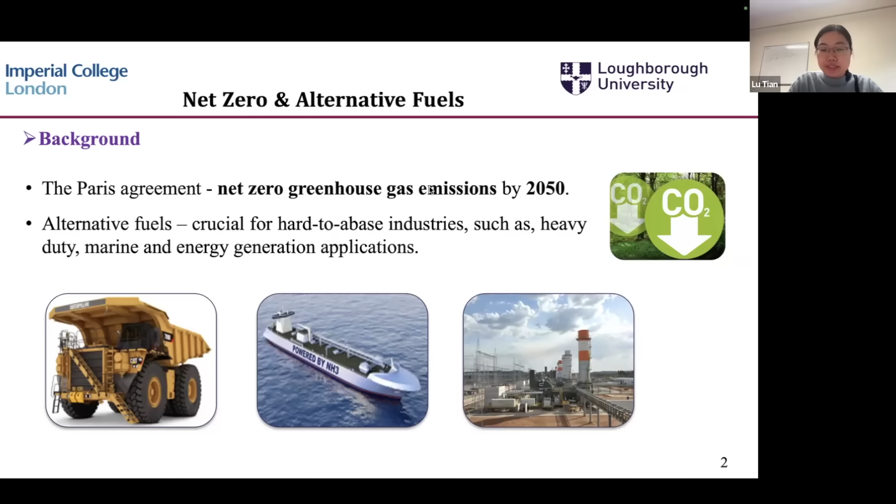So all of these applications are likely to need alternative fuel in the near future. Our question would be: which fuel do we want to use for these applications? We have multiple choices as alternative fuels, each with pros and cons, and we don't have a definite answer at the moment. What I'm presenting today is just about ammonia, but I want to list some topical candidates as alternative fuels, so maybe later we can discuss which ones you want to research and work on more.

So we have ethanol, biomethane, hydrogen, ammonia, and methanol as some of the most topical candidates for alternative fuel. They can be made from different resources: ethanol and biomethane can be made from biofuels and organic matter, and we can make hydrogen, ammonia, and methanol together at the same site using different methodologies, including renewable production methods. We can use water electrolysis to make hydrogen, and then make green ammonia and methanol from that green hydrogen. So we have a future of producing ammonia in a green fashion - that's a very key point.

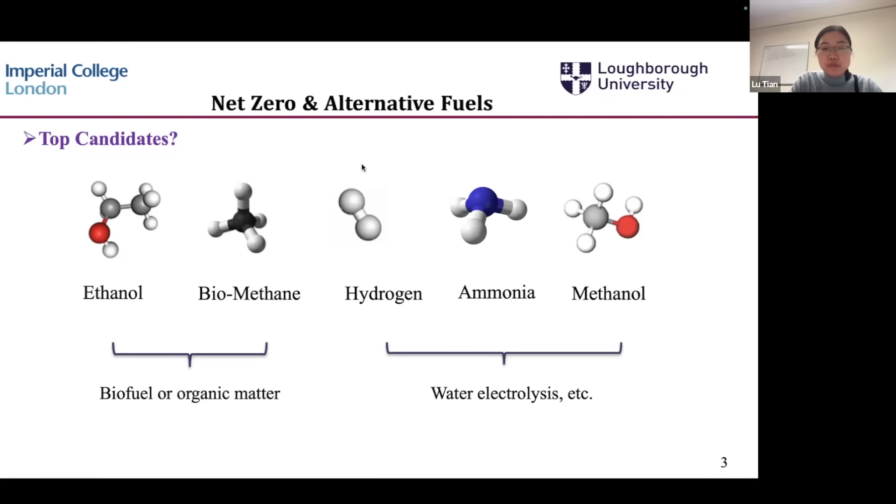The second reason is why we are pursuing ammonia - what is its history? Where did we use ammonia before burning it in energy or industrial burner applications? Ammonia has great applications, as perhaps all of you already know. It's been industrially produced in large quantities before, predominantly for fertilizers and chemical products. Because of this, there are a lot of benefits - I'll show this on the next slide - because we already have a great network which we can use to transport ammonia as a fuel. And we all know that ammonia contains hydrogen atoms, so it's a promising hydrogen carrier.

So the motivation of burning ammonia rather than hydrogen is that we can transport ammonia already. Why do we need to convert it completely to hydrogen? Can we just burn it as a fuel? So that's the biggest motivation.

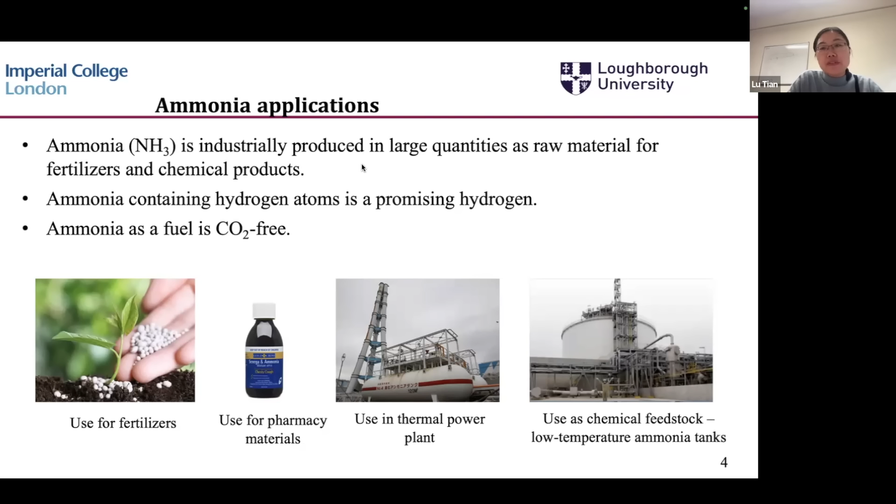And how can we do this? There are definitely challenges that we'll talk about on the next few slides. So before I do that, let me show you this graph. You may have seen this already if you work on ammonia. This is just to say, apart from the good ways of producing it in a green fashion, we also have a great network of transporting ammonia across the world from one place to another. As you can see, it's actually connecting different major points across different continents. So this is a good thing. It is a basis for our research on ammonia.

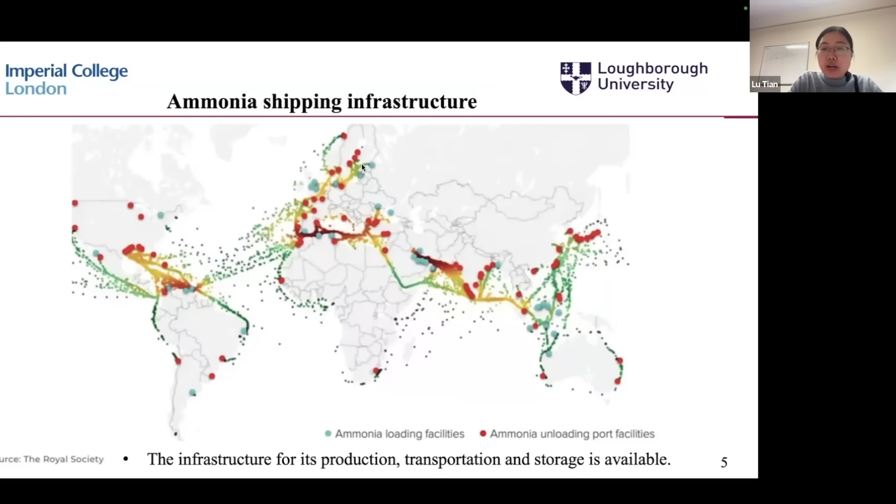This shows the great potential of moving ammonia around the world if we can produce ammonia in large quantity. So the second question is, okay, we have this infrastructure, how do we burn it? What are the challenges of that? Before I talk about that, this is just one slide about the history.

The interest in ammonia didn't just start in recent years. Actually, several decades ago, people already had interest in ammonia, especially in the US. For example, in the 1940s there was an ammonia and coal-powered bus in Belgium. Then there were studies on the ammonia gas turbine invested in the US. And also there's a combination of ammonia and liquid oxygen rocket motor that people investigated in 1967. You can see that's the period where people were quite interested in aerospace applications.

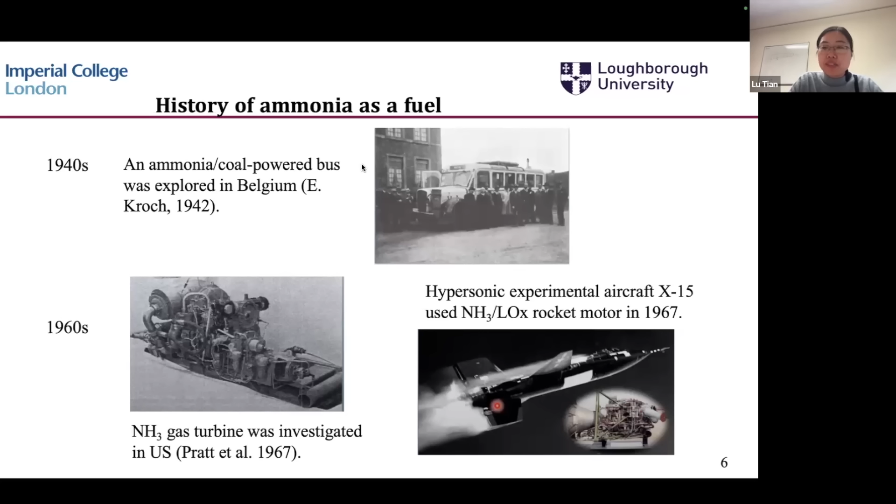That was being applied to gas turbines or hypersonic aircraft. And then the interest decreased as people met difficulties. In recent years, the interest in ammonia came back again. So we want to use ammonia as in our traditional, for example, internal combustion engine and so on. Can we do this? What are the challenges? Let's move to the next page and talk about that.

Since most of us here are actually doing combustion, I think we are quite clear about the advantages and disadvantages already. But if you don't mind, I just want to talk us through this a bit again. So why are we doing ammonia? Because it saves costs for hydrogen storage. It's difficult for hydrogen to be transported and stored. So we transport ammonia instead. If we burn ammonia, that saves the cost of transporting hydrogen otherwise.

It has mature synthesis technologies. We have methods even to produce it in a green fashion. And it's carbon-free, so it's NH3. It doesn't have a carbon element within it. So we consider that kind of environmentally benign if we consider carbon dioxide pollution. But we will talk about something else.

Then it comes to disadvantages. For example, ammonia burns very slowly. It has very slow laminar burning velocity. And because of the presence of nitrogen element within ammonia as a fuel, it can potentially generate high nitrogen oxide emissions, or we can just call it NOx, which is not pleasant either. We don't want it. It can be bad for our environment. It can also be bad for human health.

And third of all, ammonia itself is toxic. So even a small amount of it entering the human body can hurt people's health. So we don't want to have a lot of ammonia left in the end in the exhaust pipe. So we don't want residual ammonia either, people call it ammonia slip. So we want ammonia to burn more easily, we want less NOx, and we want less ammonia slip. That's how we want to overcome the disadvantages of burning ammonia as a fuel.

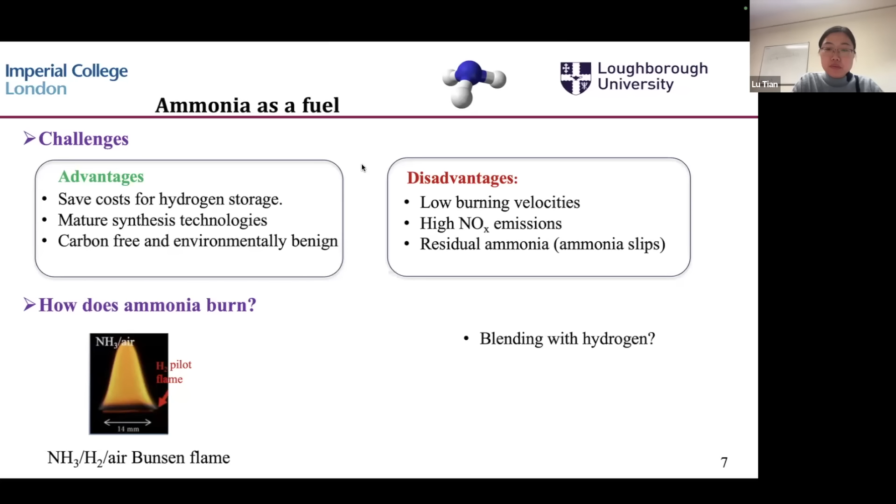Some of us argue that hydrocarbon fuels are not necessarily fossil fuels, because now we have carbon-neutral fuels that contain hydrogen and carbon elements but are not from fossil fuels—they're made from renewable sources. So there's also potential for blending ammonia with a hydrocarbon fuel. But the question is, if we bring the carbon element back to the fuel, it may generate soot. So that's the second work we're going to look at: how ammonia affects soot formation.

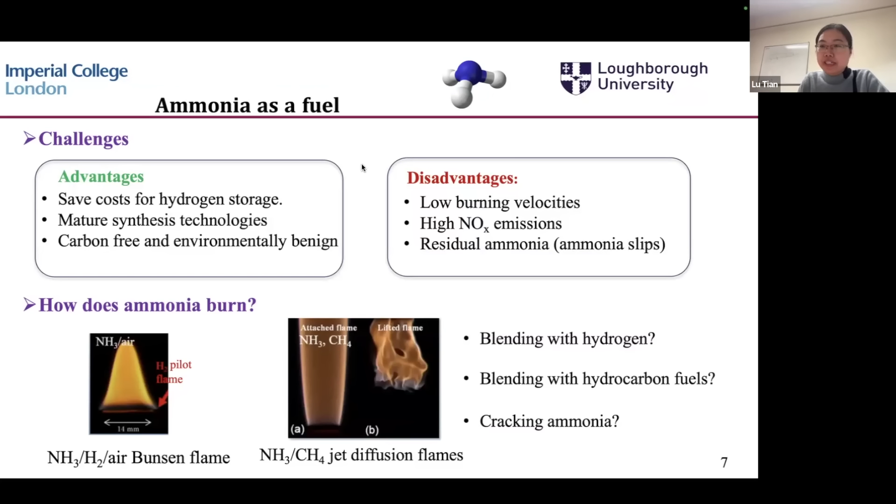The third work I'm going to look at today is how we can increase the chance of ammonia being burned. We can crack it into a mixture of nitrogen and hydrogen, but we don't want it fully converted, otherwise that would effectively be burning hydrogen. So we're looking at a particular cracking ratio, and whether we can reproduce the results from experiments. So these are the three works I'll talk about today.

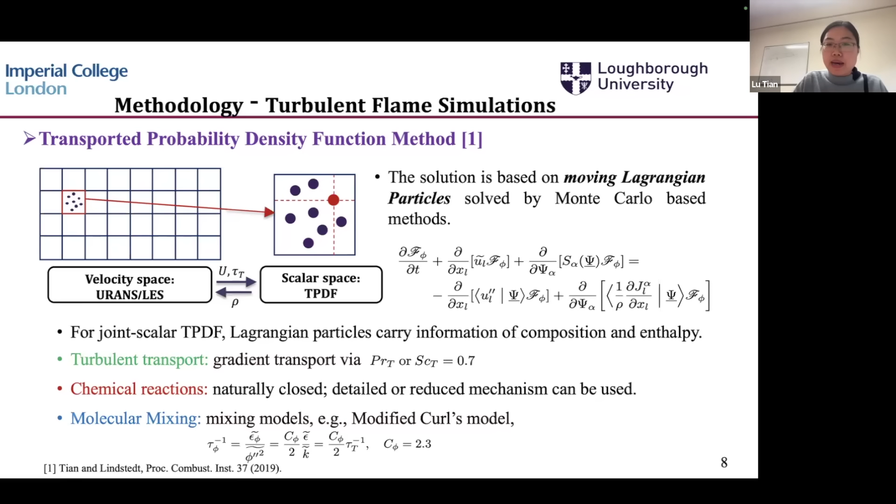So this is basically the introduction of the methods. If you still have details you're not quite sure about, that's entirely fine - this is not the key point of this presentation. I just wanted to introduce this method so you have it in the background. Let's move on to the first topic now.

The first topic I'm going to introduce today is blending hydrogen and ammonia. This work was published in 2023 and contains two parts. The first part is that we updated and revised a reduced mechanism, trying to reduce its size to include as few species and reactions as possible, while maintaining the characteristics that reproduce laminar and turbulent flame behavior. This mechanism has 22 chemical species and 102 reactions.

To validate it, we tested ignition delay time, selective non-catalytic reduction behavior, and laminar burning velocity. We also modeled this against the laminar flame, and they all achieved satisfactory results.

Then we applied this to a turbulent flame - a mixture of ammonia, hydrogen, and nitrogen. This is not based on an equivalence ratio, but just a blending of hydrogen and some amount of nitrogen as well. This configuration of turbulent combustion is in a Cabra configuration, and the Reynolds number is in the range of the traditional hydrogen Cabra flame.

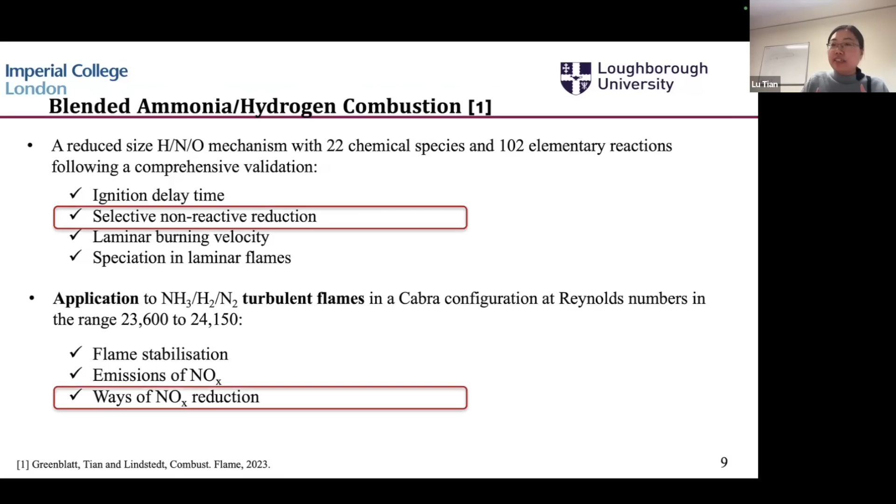I don't think we have enough time today to go into too much detail, so what I'm going to present is first how this mechanism can reproduce the selective non-catalytic reduction behavior, and second, I'll show you these turbulent flames and the ways of reducing NOx, and whether that works.

So the first question: can this mechanism reproduce selective non-catalytic reduction behavior? On the left-hand side we have four plots showing NO mole fraction under different oxygen concentrations. All the dots are experimental results, and there are three lines based on three different chemical mechanisms: the Lindstedt mechanism, a Glarborg mechanism, and the current updated mechanism shown as a dash-dot line. You can see the dash-dot line has reasonably good agreement across different oxygen levels.

There's also a key feature: when ammonia is added to the system and the temperature is between 1,000 and 1,400 Kelvin - more precisely 1,063 to 1,366 Kelvin - within this narrow window, which we call the selective non-catalytic reduction temperature window, adding ammonia causes an evident decrease of NO.

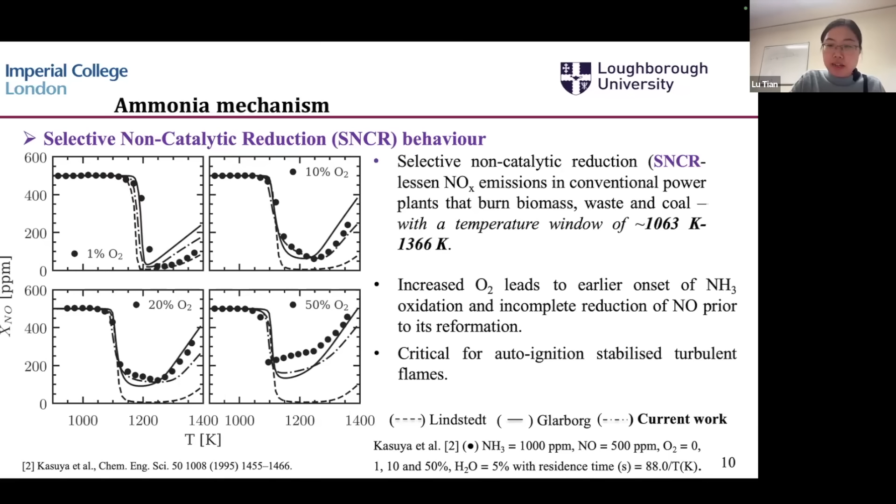And that's to say this mechanism, we trusted the behavior in the selective non-catalytic reduction temperature window in a non-turbulent setting. So we're going to now go into the turbulent flame and see how it behaves.

Now we apply this mechanism to a Cabra flame. The Cabra flame is an auto-ignition stabilized turbulent flame. The Reynolds number is around 20,000, but not exactly, and we have it listed in the table. We have 3 different groups. The first group is the traditional Cabra hydrogen flame. By the time we did this work, there wasn't yet an ammonia Cabra flame.

Sorry, I have to decline my call. Sorry about that, there's a colleague calling me.

So the first group is the traditional hydrogen Cabra flame. At that time we didn't have the ammonia Cabra flame, which we have now, so we're working on a new simulation for it. Back then we numerically explored the difference between hydrogen flame and ammonia hydrogen blends. For the second and third groups, we replace some hydrogen with ammonia. For case 3, I replace 10% of hydrogen by volume with ammonia. For case 4, I replace 20% of hydrogen with ammonia by volume, just to see what's the difference.

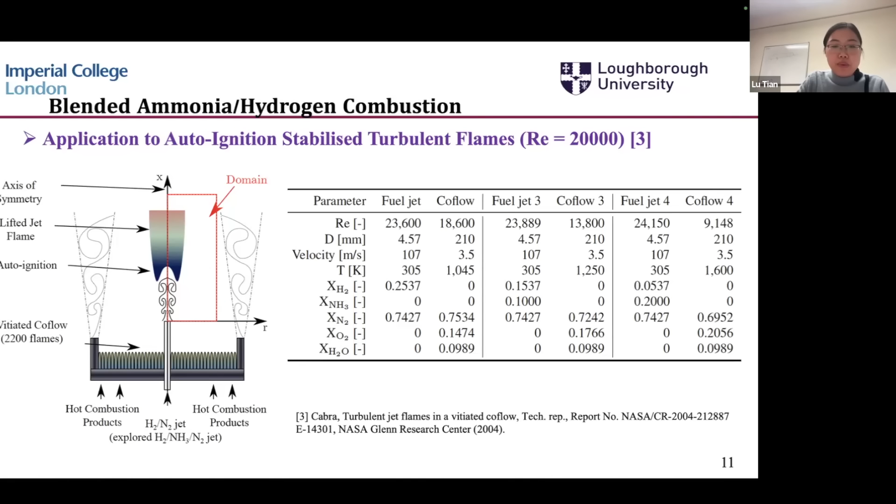Let's go on to the results section. Before we see the NOx reduction behavior, we look at the mean contour plots of NO and OH, to see how it differs from the Cabra hydrogen flame to a flame containing 20% ammonia.

First, we want to say that if we keep the same coflow temperature of 1,045 Kelvin, we won't be able to stabilize the ammonia flame. So for ammonia flame, we need a higher coflow temperature in order to stabilize the flame at a similar stabilization point. This may sound a bit vague, but I can show you in the next slide what that actually means.

Second, looking at the plots, the max of OH varies - it's much closer to the burner exit for the hydrogen flame, and becomes much further downstream for the flame that contains 20% ammonia.

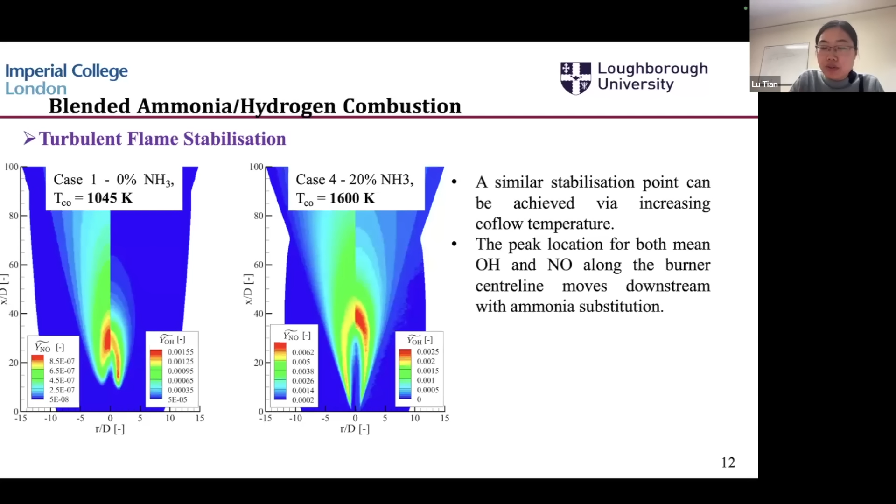Let's look at the line plots and see how, when we change the coflow temperature, increasing it from 1045 Kelvin up to 1600 Kelvin, the stabilization point varies for these ammonia and hydrogen blends. These are the variations for 3 cases: the black line is case 1 with 0% ammonia, case 3 has 10% ammonia, case 4 has 20% ammonia. The circles are experiments for case 1 at 0% ammonia. The black solid line agrees well with the experiments for hydrogen, which is a good starting point. Then we went on to cases 3 and 4.

By saying similar stabilization point, I'm trying to achieve the same curvature, the same gradient of the temperature line, so it increases following a similar gradient. If I don't increase the coflow temperature, the temperature profile becomes much flatter. So to achieve the same amount of temperature increase as the hydrogen flame, it needs a much higher coflow temperature.

What impact does this have, for example on OH or NO species? Because we have a higher coflow temperature, it eventually leads to a stronger OH distribution along the burner axis, so OH becomes larger. Then looking at NO, because we have 10% and 20% ammonia for case 3 and case 4, we have much larger NO in these turbulent flames. The solid line for no ammonia is actually off the page, because the amount of NO produced is not comparable with cases 3 and 4.

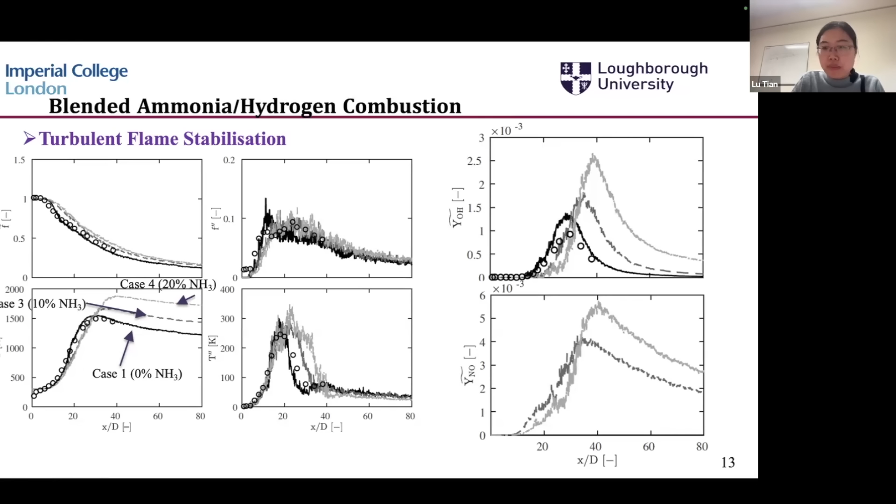So now the question comes: can we just reduce it? Within this work, we're trying to see if we operate the ammonia combustion within the range of the selective non-catalytic reduction temperature window, does it work for these turbulent flames?

So we have this plot. Left-hand side is the maximum NO within the domain, while the right-hand side is the location where the flame actually stabilizes, where the maximum temperature is, and how the gradient looks like.

You can see this slope pointing to the left-hand side, meaning when we start from a higher temperature, the TC on the x-axis is the coflow temperature. For example, case 4 has TC equal to 1600 Kelvin.

So it starts from the point on the right-hand side, which has a relatively high amount of NO. When we reduce the coflow temperature, it stays more or less similar until we go inside the non-catalytic reduction temperature range, and suddenly drops by an order of magnitude when operating within this range. You can see where the flame actually stabilizes changes dramatically in the same temperature window, while it looks more or less similar outside the range.

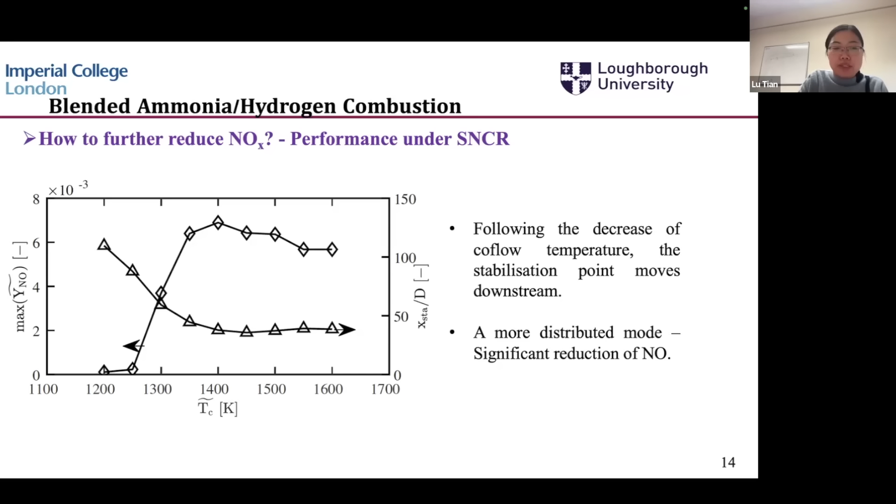We can actually come up with other strategies to further mitigate that. But that is to say, this is good, this is very good already. Okay, that's basically the first work.

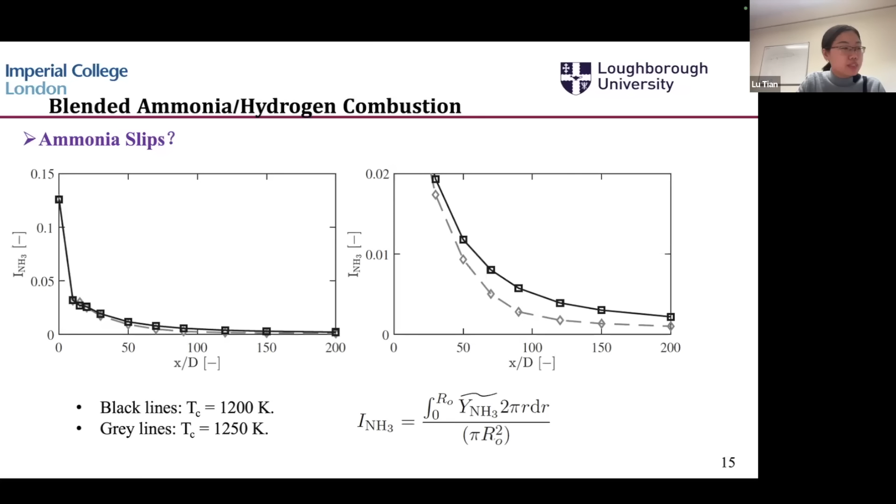And then we come to the second work. The second work has soot involved. The first work just had a mechanism, a turbulent flame simulation for ammonia and hydrogen. The second question comes: what if it blends with hydrocarbon fuel?

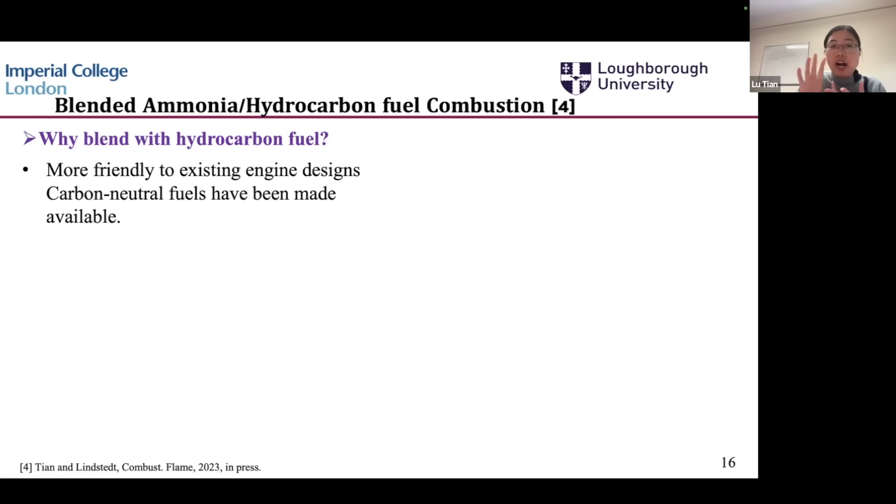Why are we doing this? What is the motivation of putting carbon back into the fuel again? There are arguments that burning hydrocarbon fuels could be more friendly to the current design of engines. Also, carbon-neutral fuel has been made available, so hydrocarbon type fuel is not necessarily from fossil fuels.

But therefore, it is also necessary to investigate the impact of adding ammonia into the hydrocarbon fuel and what it looks like.

Why do we want to investigate soot? Even if we're not directly doing soot formation, we understand soot is harmful for health, and is also the second largest contributor to global warming. What we're trying to do is reduce soot as much as possible.

We also want to understand the particle size distribution of soot. Why do we need PSD, particle size distribution? It's because the size of the particles is actually relevant to how toxic and how bad it is for human health.

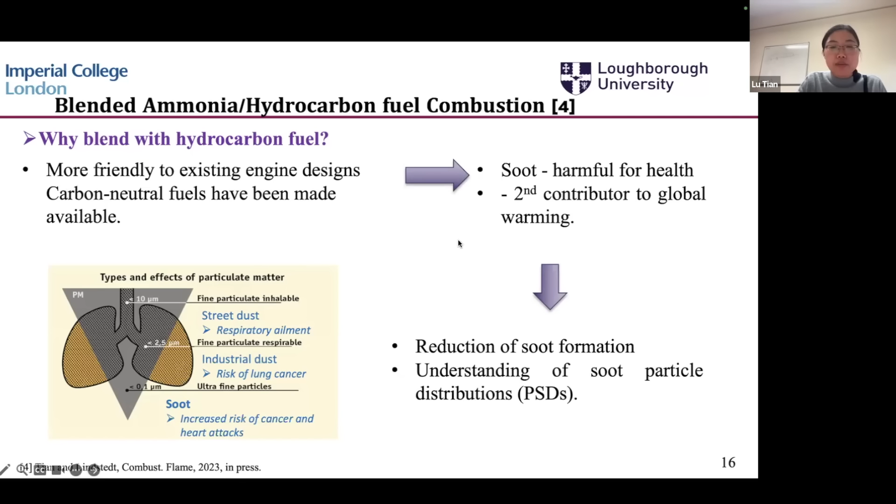I didn't change this, but this has been published in 2023 already in Combustion and Flame. Let me just introduce the approach first. For this work, I also include two parts of research.

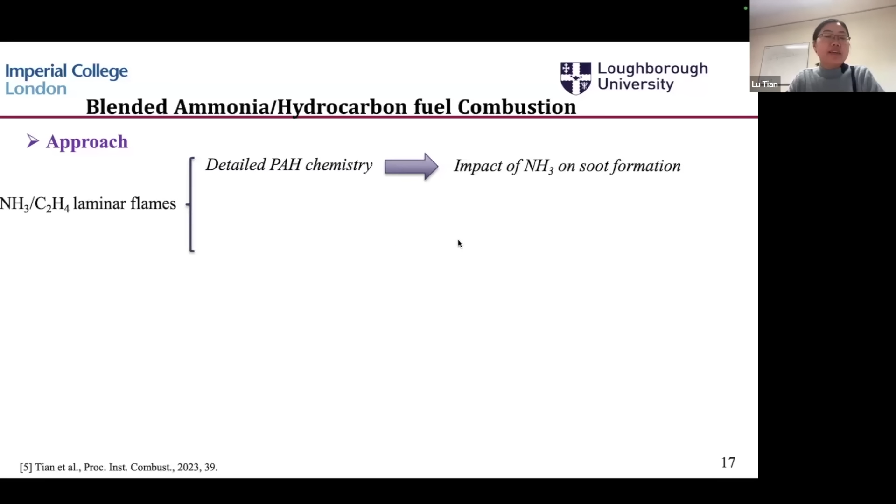The first part is a laminar flame, the second is a turbulent flame. So the first part is ammonia ethylene laminar flames. The reason I'm doing ethylene is that 90% of the fundamental studies for soot formation are based on ethylene flames, so it's natural that people want to investigate a mixture of ammonia and ethylene rather than a different fuel type. The first investigation uses detailed PAH chemistry to simulate ammonia ethylene laminar flames, to see how it performs against experiments, and to investigate the impact of ammonia on soot formation.

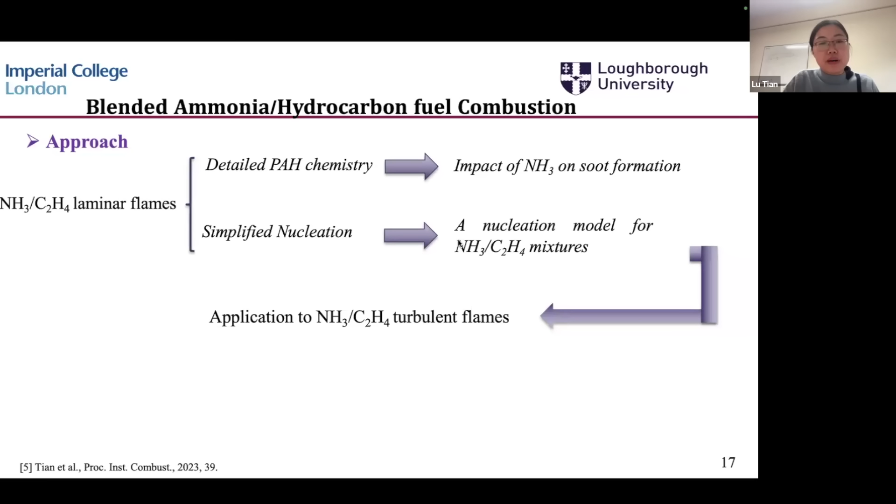Then the question becomes how we want to simulate the same type of fuel in the turbulent combustion context. We know detailed PAH chemistry consists of hundreds of species and thousands of reactions, so it's not realistic to include the complete detailed PAH chemistry for turbulent flames. So what we did is try to use a simplified nucleation model. We developed this simplified nucleation model for ethylene flames and ethylene flames at elevated pressures, and now we want to recalibrate it to make it work also for a blend of ammonia and ethylene, and apply it to ammonia ethylene turbulent flames. That's the motivation of the second work, and that's how we actually did it.

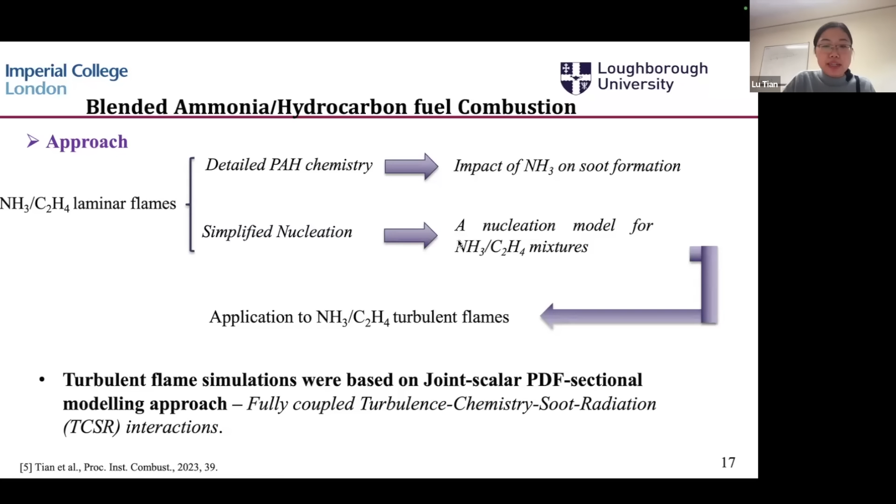This method is again based on the joint scalar transport TPDF method, but different from the previous one in that the previous one does not have soot formation. For this work, we have soot formation, using a sectional model method. The sectional models are actually integrated into the Lagrangian particle as well, so in our Lagrangian particle we have the mass fractions of each gas phase species, enthalpy, and also different soot sections. Therefore, this is a fully coupled turbulent chemistry, soot, and radiation model.

Now we're going to look at the results.

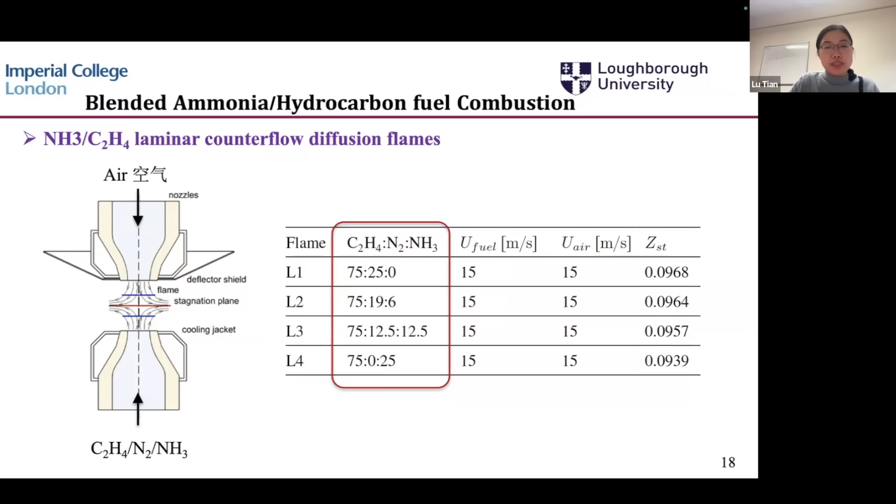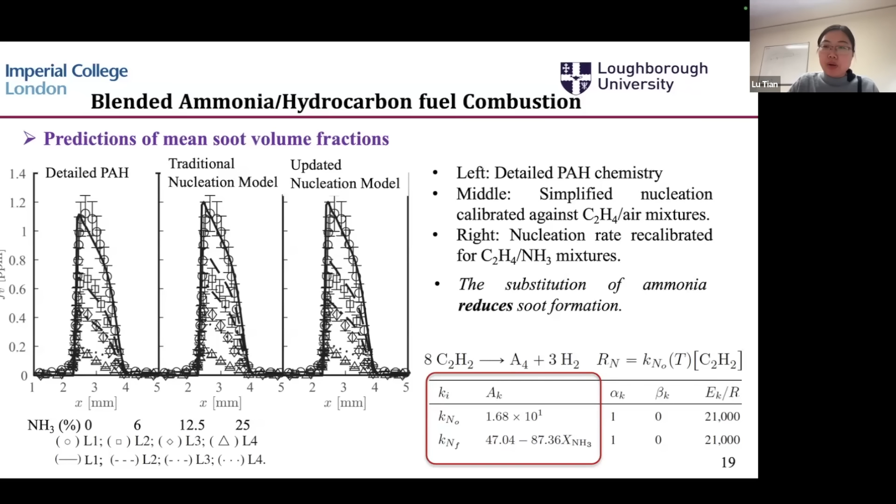We have only two questions left now. The first one is, we can see this trend: when we add more ammonia, the amount of soot reduces. What is the key reason behind that? And the second thing we want to look at is, does this new recalibrated nucleation model still work for turbulent combustion?

Okay, let's answer the first question first. Before that, this is based on detailed chemistry. This plot shows how different concentrations of ammonia and ethylene, the different ratios of these, change the distribution.

On the left-hand side, since we have soot sectional models, soot is categorized into different sizes. So we look at soot sections with diameters around 3 nanometers, 15 nanometers, and 77 nanometers, and see how that looks. When we have more ammonia, changing from solid line to dotted lines, we appear to have more smaller particles. While for the big particles, when we add more ammonia, we seem to have smaller big particles, like the 77 part. That's the same as the PSD.

So the right-hand side column is the particle size distribution, a very key thing people look at for soot formation. The x-axis is dP, the average diameter of the soot particle, in log scale.

You can see for the smaller particles, upstream, there is variation consistent with our observation on the left-hand side - when we have more ammonia, we have more smaller particles. If you look at the right-hand side of the PSD, it tends to have fewer bigger particles. So this variation shows that although overall we have fewer soot formed as we add ammonia, the change among big particles and small particles is entirely different.

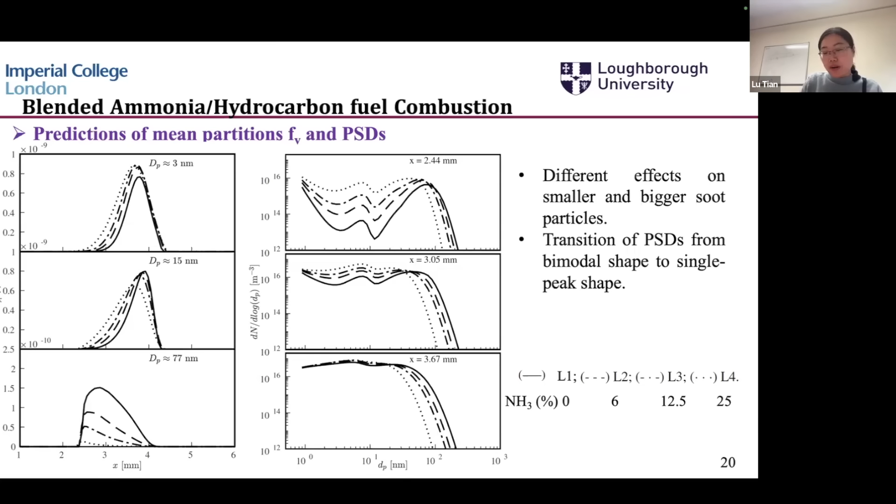Also, why does ammonia affect the overall production of soot? What's the key mechanism behind it? Our first intuition would be, is it about oxidation? Should we have more oxidation that leads to less soot formed?

That's why we need to look at this plot. On the left-hand side, we have a plot which shows all the major sources of oxidation for soot. The biggest contribution, I would say, is from OH. All the rest are very similar and coincide with each other - we can't really tell the difference, so we're not going to talk about them.

So just looking into the oxidation of soot because of OH. The right-hand side is the OH oxidation rate for the four flames. The line type is still the same as before: the solid line is where we have no ammonia at all, and the dot line is 25% ammonia.

As you can see, soot oxidation actually reduces when we increase ammonia. You can see the oxidation rate magnitude reduces as we add ammonia. Therefore, oxidation is not the contributor to reducing soot. So what could that be? What could be the driving mechanism behind it?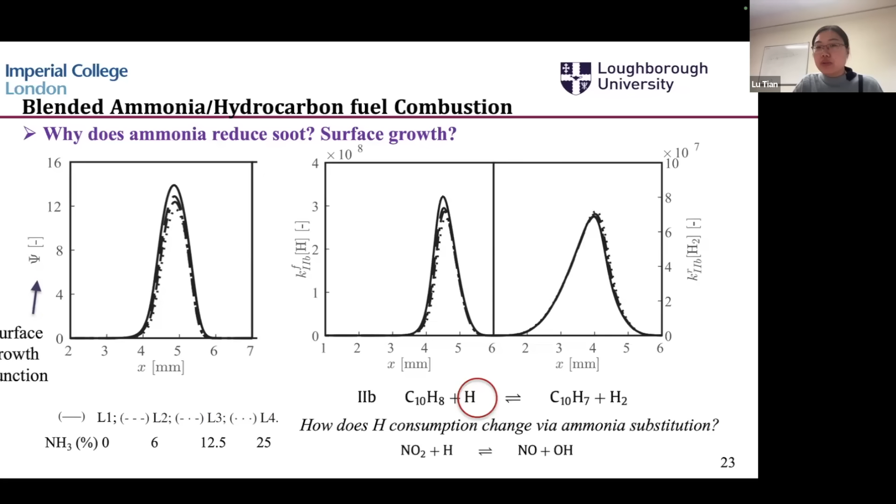This becomes the last question: whether the surface growth model, the simplified updated nucleation model, actually works for turbulent flames. Thankfully, the Sydney group has a scaled-down setting inhomogeneous jet burners, which looks into the same mixture of fuel, containing all the way from 0% ammonia to 25% ammonia.

And we want to check whether surface growth is still the most evident factor inside the turbulent flames. We plot out the surface growth function and found that again it's the most evident contribution to the soot reduction in the turbulent flame context. You can see there's a decrease of the peak, and also a shift of the peak soot location, from further upstream a bit toward downstream.

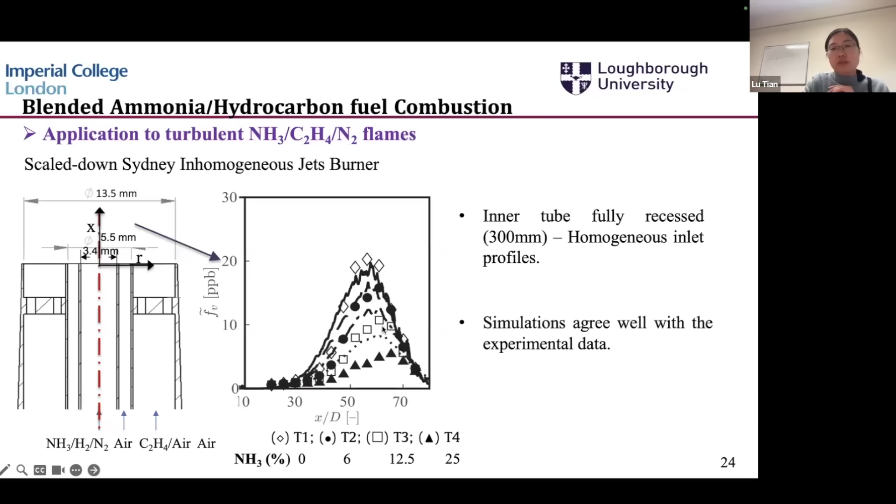If we consider going from 0% ammonia to 25% ammonia, the peak actually shifts a bit downstream when we look at this plot, and it's the same trend as the soot. From 0% to 25% ammonia, the peak of soot also shifts from further upstream to downstream. So it shows the same trend, tells the same story: surface growth decreases with increasing ammonia concentration, also in the turbulent flame context.

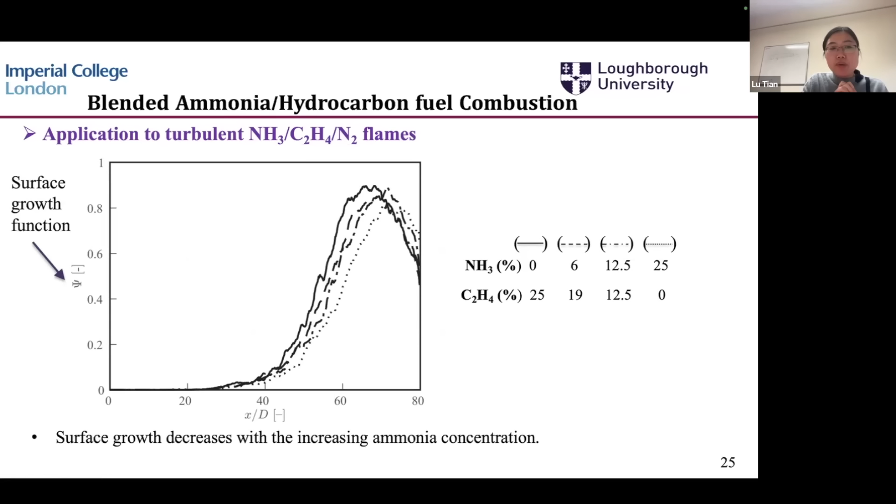So this is an encouraging result in the turbulent flame case as well, and that concludes our second work.

Now we're going to introduce the last work I'm going to present today. This is one of the recent works we have done: modeling the cracked ammonia flame at elevated pressures. This is a turbulent non-premixed flame, with the mixture being ammonia, hydrogen, and nitrogen, where the ammonia here is cracked.

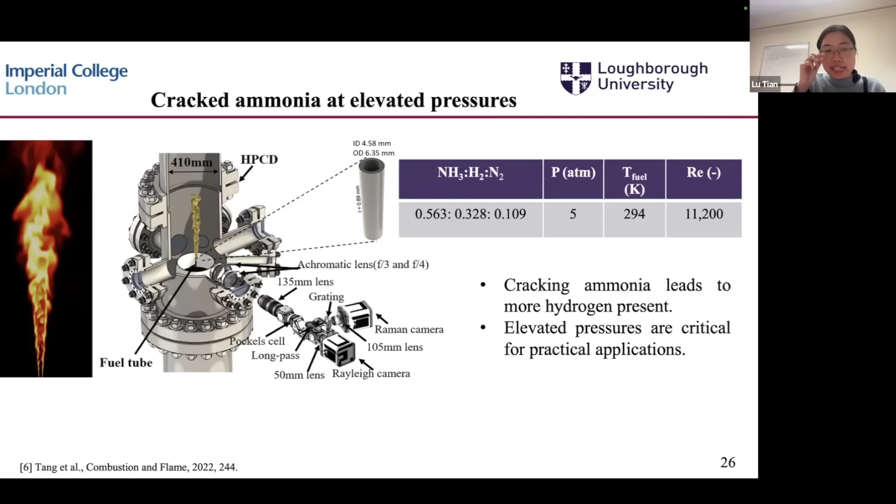Okay, so here, before I show you the results, just to show you what we did within our model. For the transported PDF method models, we used moving Lagrangian particles, which contain 3 different elements: the molecular mixing in composition space, chemical reactions, and turbulent transport.

Within this model, one of the key parameters we look at in this work is the last term on the right-hand side. We normally solve it directly by the molecular mixing in composition space model, but this is done under the high Reynolds number assumption, so we actually neglect the first term of the second equation. We just did a modeling for the second term of this equation.

But effectively, if we revoke the high Reynolds number assumption for this equation, we still need to model the first term. So there is another model for this first term, called molecular transport in physical space. This model was first developed by Stephen Pope's group from the US.

And here we integrate this model into our code to represent the impact with complete differential diffusion impact, because we revoke the assumption of high Reynolds number.

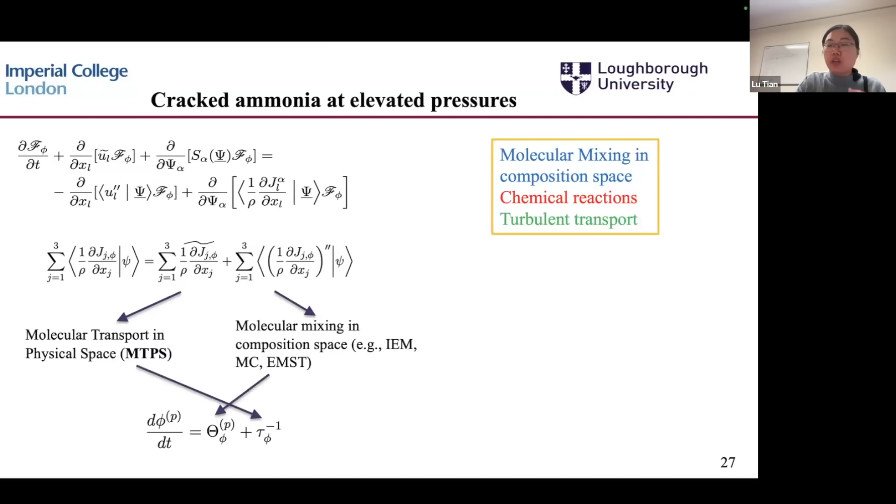So I mentioned that we actually solve this in the Lagrangian particles. The composition space varies because of the transported PDF model, so we have an additional step in order to calculate this molecular transport in physical space. For our simulations in this work, we now just have 3 steps.

We have 4 steps now. We have an additional step, which we call MTPS - molecular transport in physical space - which considers the complete version of the right-hand side, the last term of this transported PDF method, in order to account for the impact of differential diffusion.

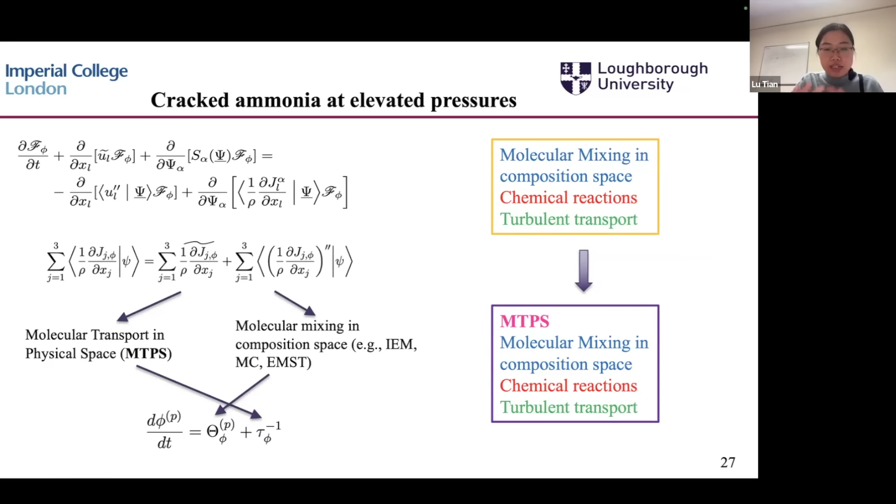So that's an introduction of what the model changes are for this work. And then let's look into the work, let's look at how the comparison looks like. This work has not been published yet - it's currently under review in Combustion and Flame.

So on the left-hand side, we have mean temperature and RMS temperature. On the right-hand side, we have the mean hydrogen mass fraction and the RMS of hydrogen mass fraction. The black line is EMST, one of the molecular mixing models, and MTPS is the additional term that we added in order to evaluate the differential diffusion.

So the black line is where we have the full model, and the red line is where we neglect MTPS, where we have EMST only. If you look at the left-hand side first, does it make much difference for the temperature? I would say the answer is not quite. For the mean temperature, you can't really see much difference, and for the RMS temperature, at x over d equals 10 or 20 there's not much difference.

For 40 or 60, there seems to be a decrease in RMS of temperature when we add MTPS, and this could be because of some additional terms that we added into the enthalpy correction that affect that. But that's not bringing a better prediction when we look at the black line, though it isn't unfavorable for all the other mass fractions.

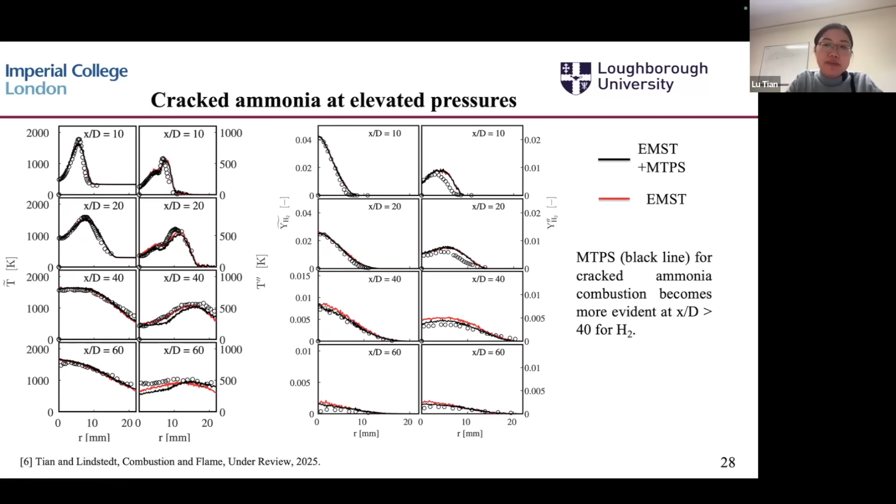So this is for the downstream region, where the turbulence is more reduced, and the flame structure tends to have a tendency toward local extinction, but it's not showing great extinction for this flame.

And we want to look into other species as well. It does not show too much difference for other species. As we know, the differential diffusion is most evident for hydrogen, not much for other species.

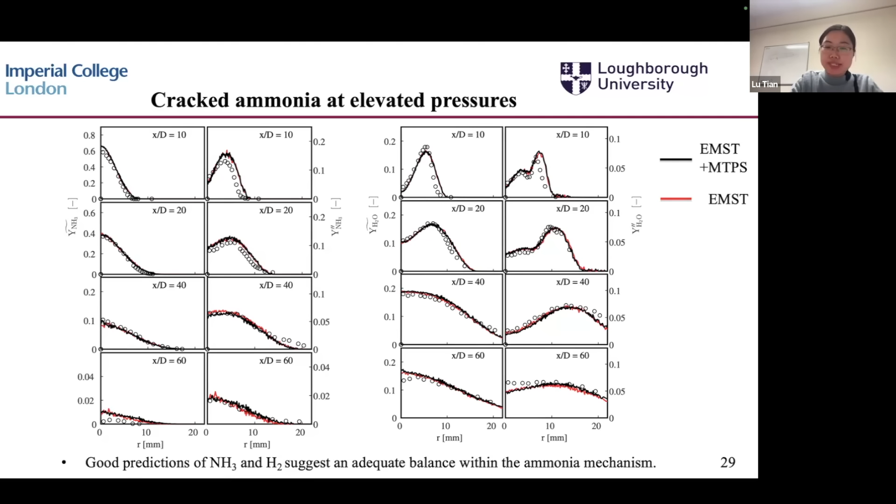So let's go on and talk about whether this MTPS has some other impact. For transported PDF methods, we have Lagrangian particles which move around the flow domain. We can actually look at how these different particles move in different spaces and how they show different properties. Therefore, we can actually do a lot of statistics.

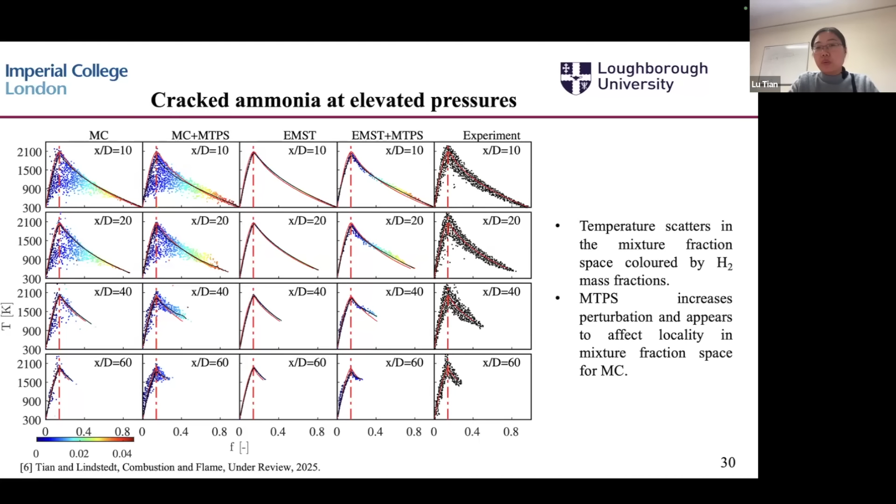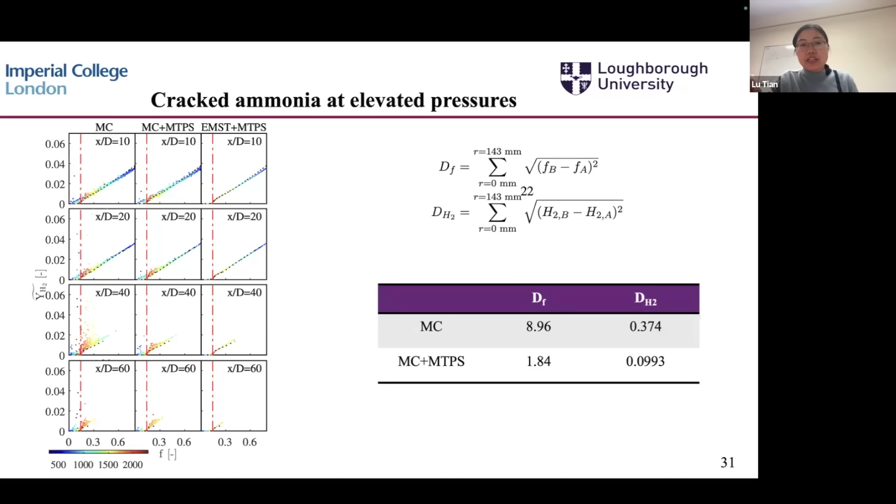So now in this table, we compare MC and MC plus MTPS. You can see for both parameters an evident decrease when we add MTPS. This is to say, by adding MTPS, it produces a positive impact on the modeling using the modified Curl, the MC model, because it mitigates the impact of non-locality in mixture fraction space. Although it does not predict as good results as EMST for this flame.

Then it comes to the key focus: differential diffusion. So where does differential diffusion actually play a role? We have this—

Sorry to interrupt you. If you can conclude in the next couple of minutes, please. Yeah, thank you for reminding me. We're going to have four more slides, and then we're going to finish. Okay, thank you.

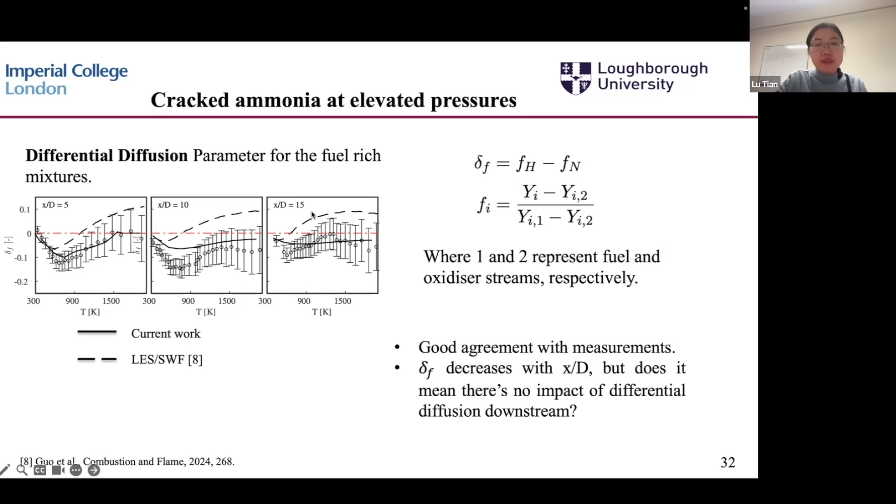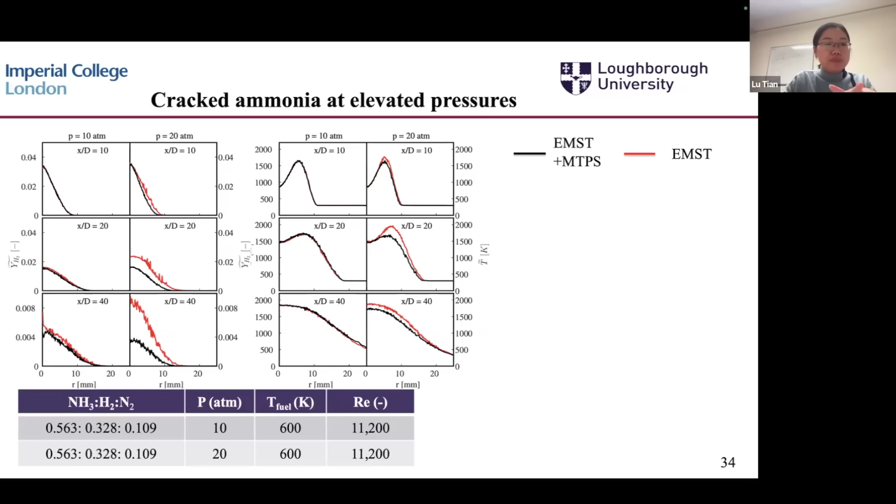The last thing we did was numerically explore further elevated pressure, at 10 and 20 atmospheres. You can see even at this higher pressure, the profiles of hydrogen show a big difference compared to 10, and the PDF also shows a big difference, not just at the location of peak temperature but also at the centerline. Therefore, when we have even further elevated pressure, the impact of differential diffusion cannot be neglected.

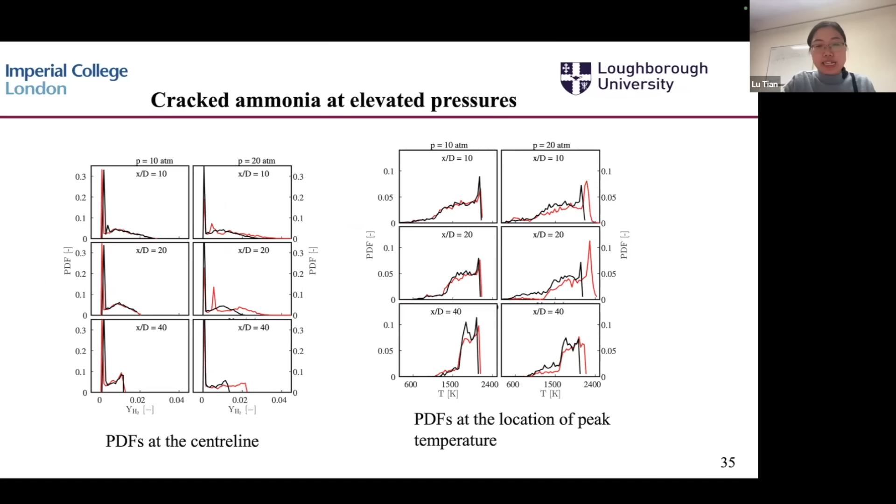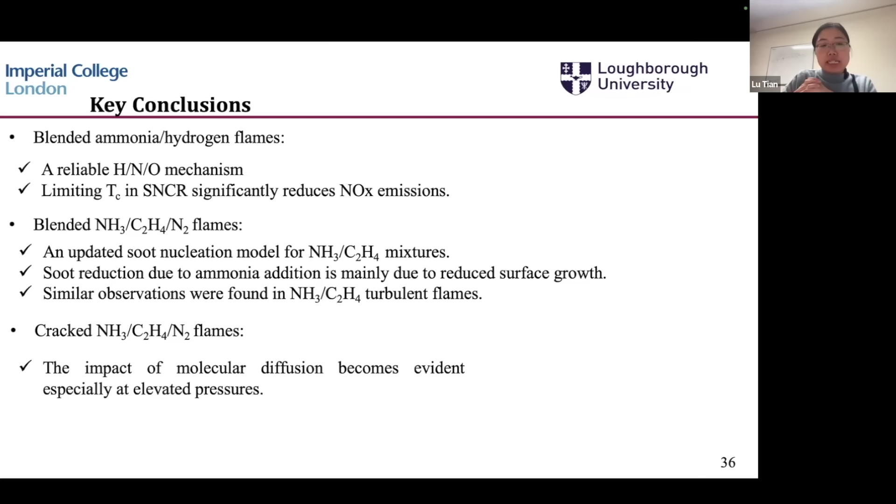We looked into how to update the soot nucleation model and apply it to turbulent flames, and what the driving mechanism is behind the reduction of soot due to ammonia substitution. In the last work, we looked at simulation of cracked ammonia turbulent flames, examining the impact of differential diffusion similar to the experimental condition and also at further elevated conditions. We found this to be very important, especially at even further elevated conditions.

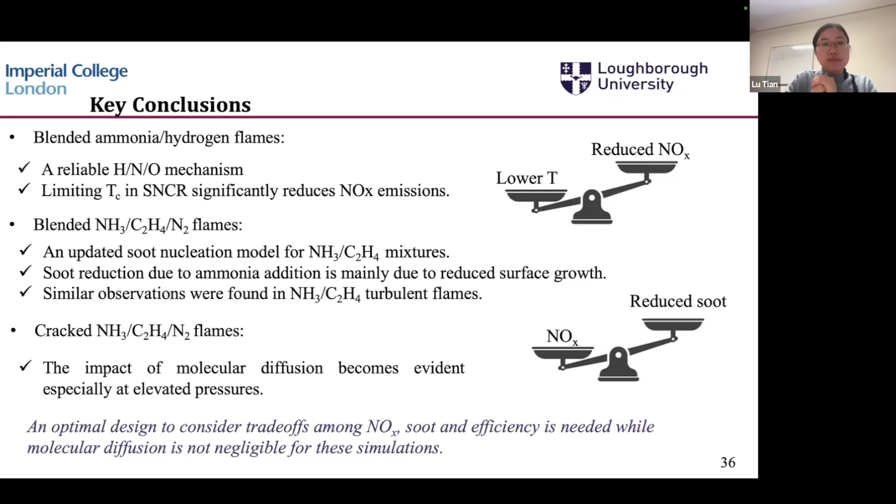To model ammonia flames and combustion, we look into different pollution and emission elements. There are a lot of things to consider around temperature: lower temperature helps NOx, and NO2 elements can actually reduce soot. So there is a trade-off between NOx, soot, and the efficiency of the whole system that people need to look at in the future for ammonia combustion. That's the major conclusions and takeaways for today's presentation.